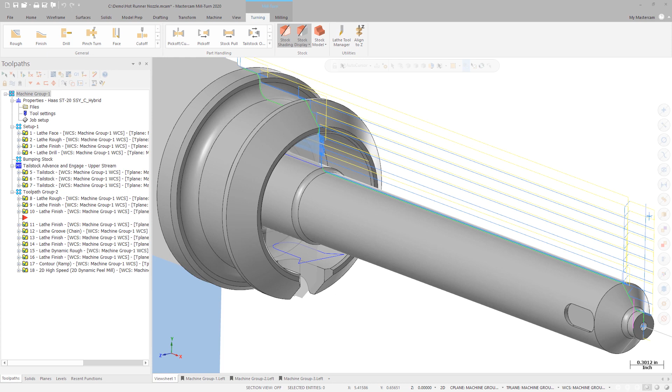There have been a number of enhancements made to Lathe for Mastercam 2020. 3D tooling, which was introduced in Mastercam 2019, has received a number of usability improvements. On the mating page, new Stop on Contact functionality makes it easier to mate an insert and holder. Simply move the insert towards the mating face on the holder, and Mastercam will automatically stop the insert when it detects that the face of the insert is in contact with the face of the holder.

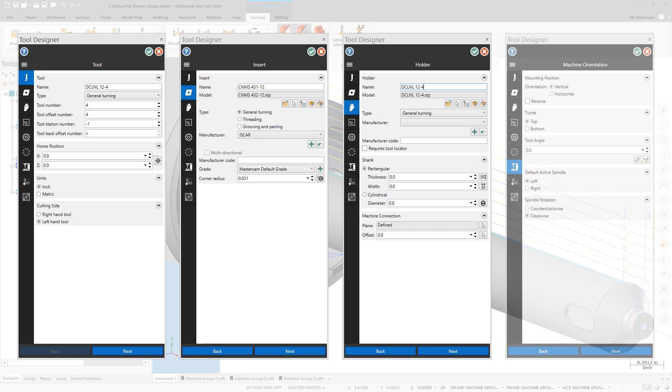When defining a 3D tool, Mastercam 2020 will now automatically populate the compensation page based on the tool geometry and machine orientation options that were chosen during tool setup. If you need to make additional changes to the compensation point that was set by Mastercam, you can do so by adjusting the options on the compensation page.

3D tool icons have been added to Mastercam 2020 to make it easier to distinguish between 3D and non-3D tools when viewing tool lists. New Inserts and Holders tabs, along with Insert and Holder filtering, have been added to the Lathe Tool Manager in Mastercam 2020. The Inserts and Holders tabs allow you to view any inserts and holders in your libraries, as well as launch the new Insert and Holder designers.

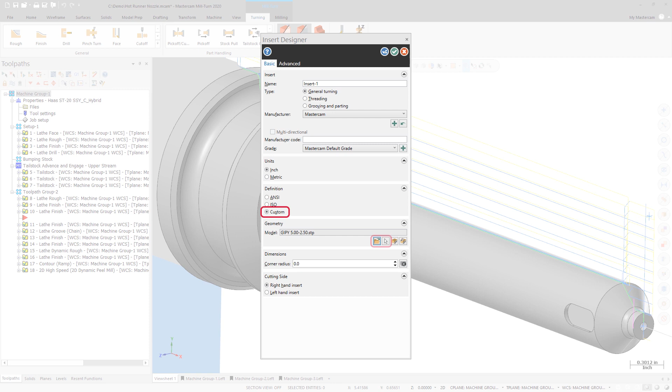The new 3D Insert Designer supports ANSI and ISO parametric definitions, as well as custom inserts based on solid models. One of the many benefits of using 3D inserts over 2D inserts is being able to properly represent relief angles during backplot and simulation. You can easily convert your 2D inserts into 3D inserts by right-clicking them in the Inserts tab and selecting Edit Insert.

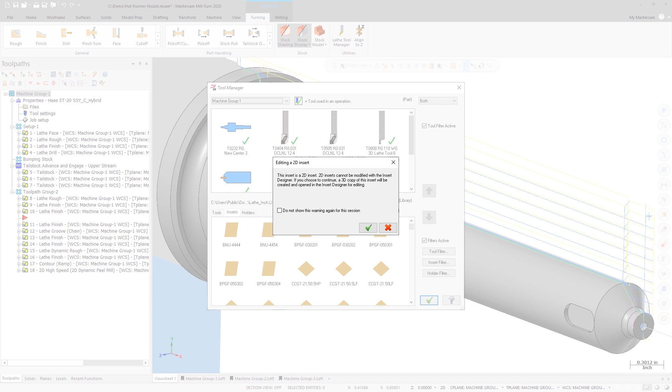You will then be asked if you would like to convert this insert to a 3D insert. If you say yes by clicking the green check, a copy of your 2D insert is made and then opened in the Insert Designer function panel. The new Holder Designer allows you to create 3D holders from solid models.

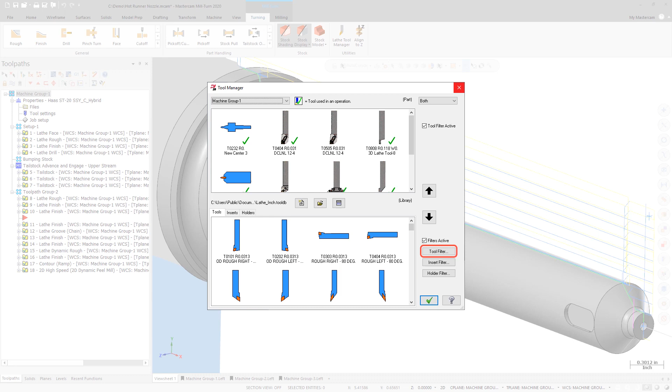Similar to the existing tool filter functionality, the new Insert and Holder filters allow you to filter the library items displayed in each tab in order to make locating your desired insert or holder easier.

Starting in Mastercam 2020, parametric jaw definitions are more powerful and flexible because of a number of enhancements and new features. In addition to rectangular jaws, pie-shaped jaws are now supported. You also have the ability to define as many steps as required for your jaws, along with a custom width, height, and radius for each step. You can easily reverse the steps on your jaws to change the mounting orientation when needed.

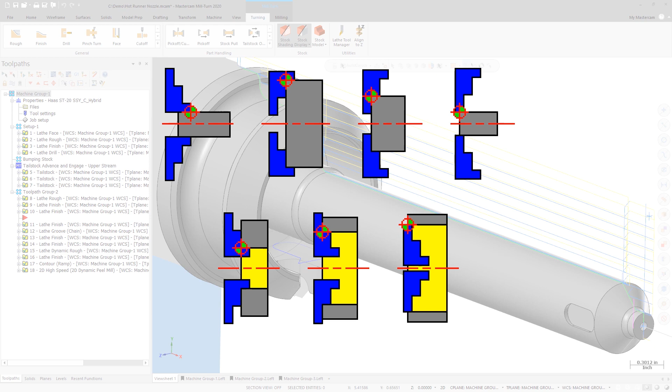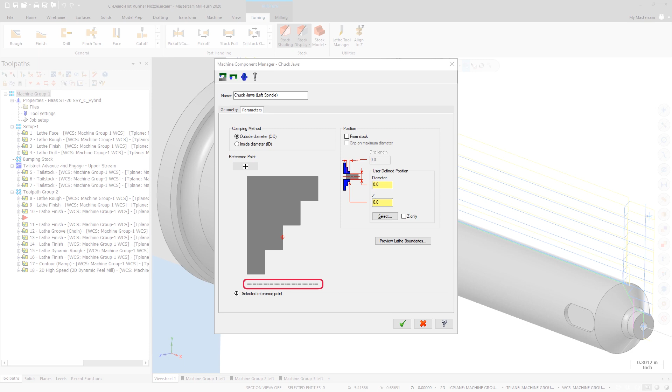Previous versions of Mastercam limited you to a fixed set of 7 possible reference positions to identify the location where the jaws clamp the part. In Mastercam 2020, you can now select any point on the profile of the jaw as a reference point. The preview will update in real time to show you the overall shape of the jaws and reference point location as you make your changes, and the center line display reminds you of the orientation of the jaw in the chuck.